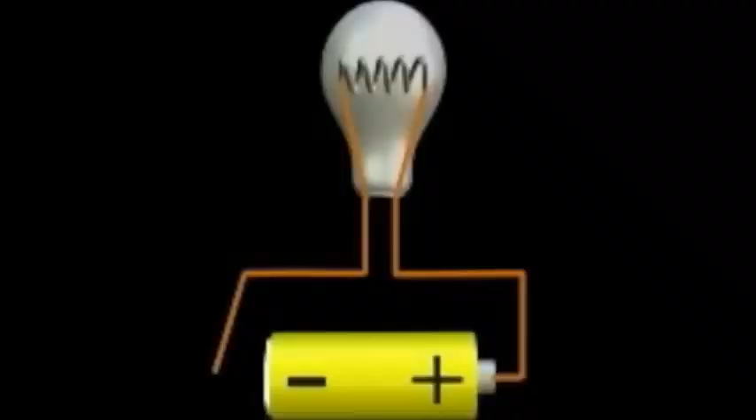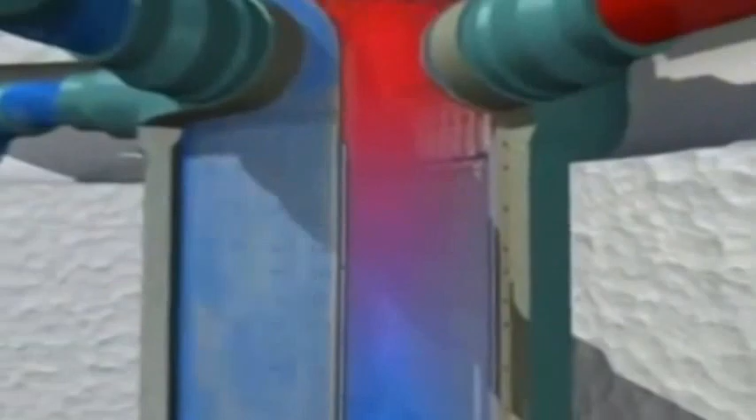My BTech as a mechanical engineer at SCTM Technical Campus. Friends, in this technological world, everything is going too fast. It is a collaboration of all fields like computer science, electrical, electronic and mechanical things.

When we took a glance at this field one by one, what we get is too much amazing. In case of computer and information technology, what we see is incredible. Everything is done by computer. We are totally connected with computers. When we buy anything, sell anything, everything is now happening on computers.

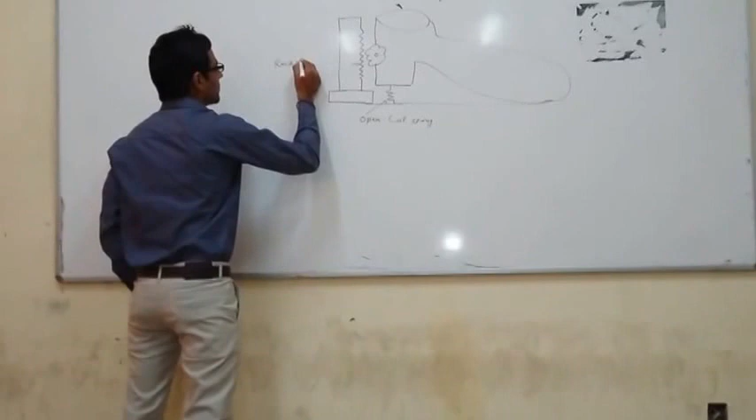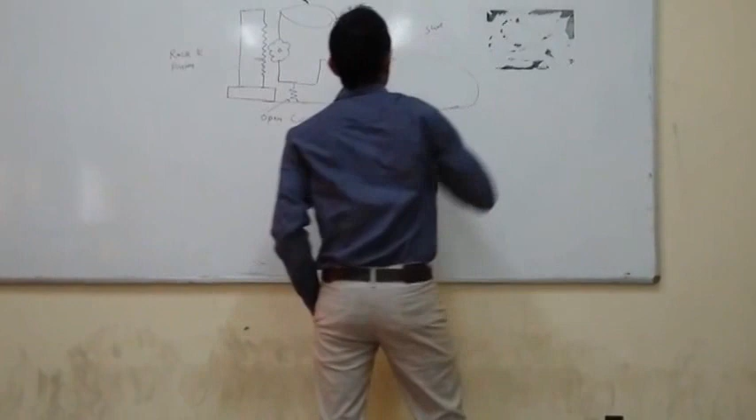When we come to the electronic part, it is an early technology which made everything at micro level. Everyone is addicted to these devices. The best invention of this field is our mobile phone. Everything is just in one touch. We have to view our temperature, news, everything.

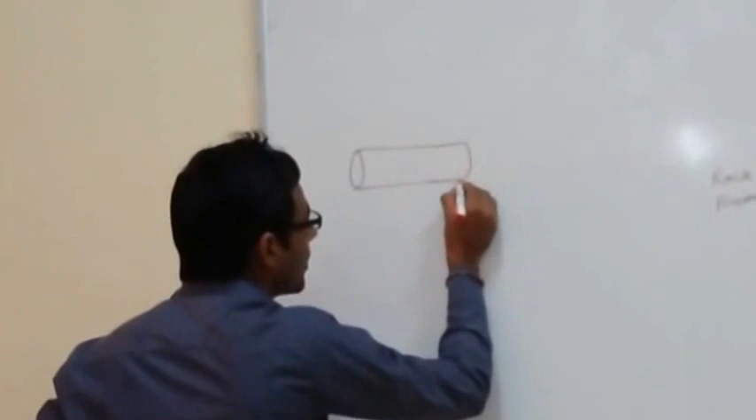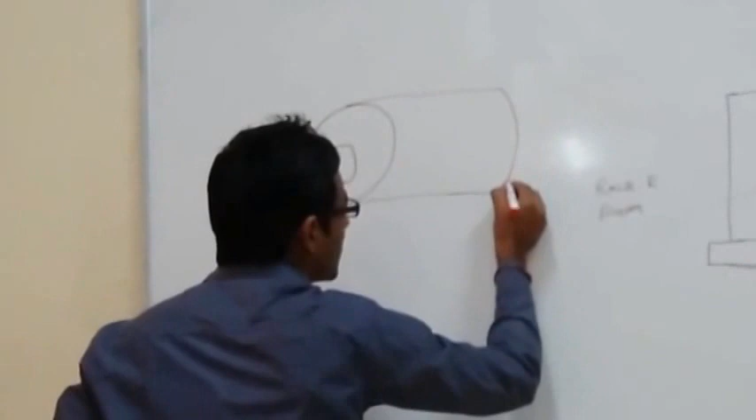Just amazing. If we take the electrical part, then it is the heart of all the above technology, which is electricity. Everything made by us works if we have electricity. Production of electricity is also an attractive method. It can be done by sun, water, nuclear power plants.

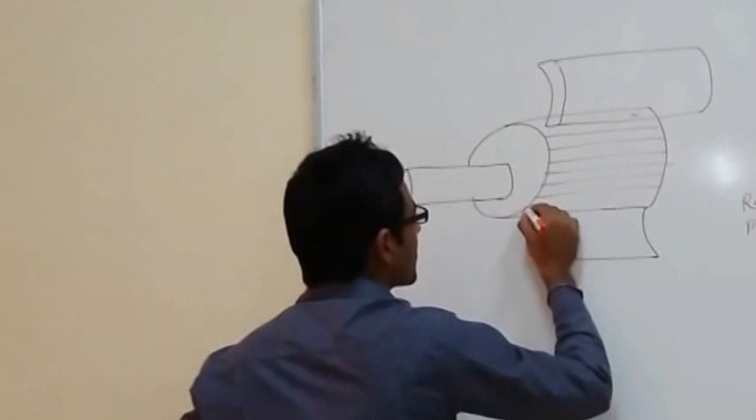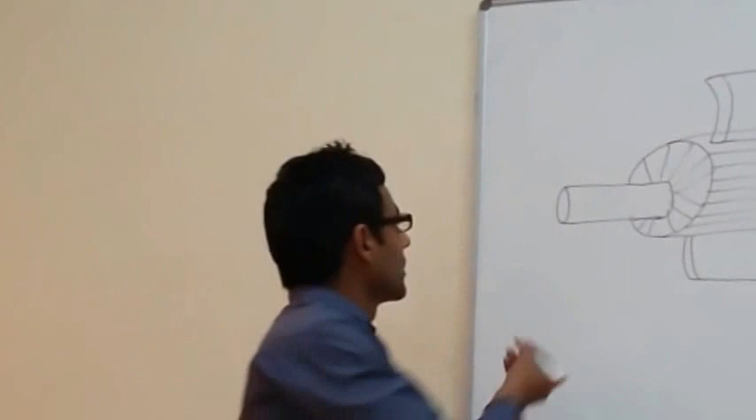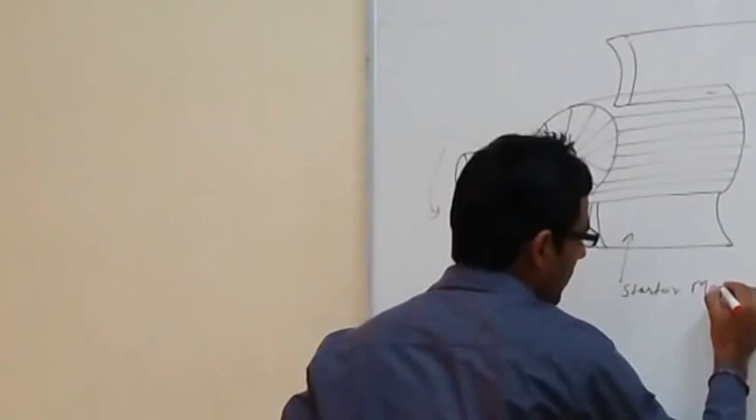In this world, every country produces million or billion watts of electricity per day. Even then, there are lots of places in this world where electricity is a big problem.

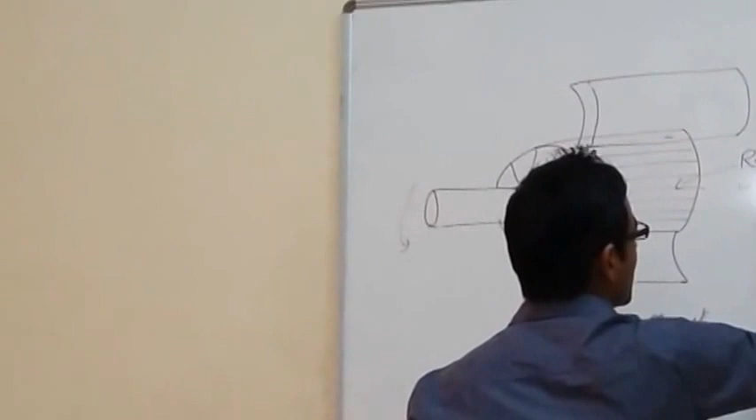Anyway, come to the point. In this busy life, no one has time. Everyone is running behind his work. People don't even have time to charge their phone.

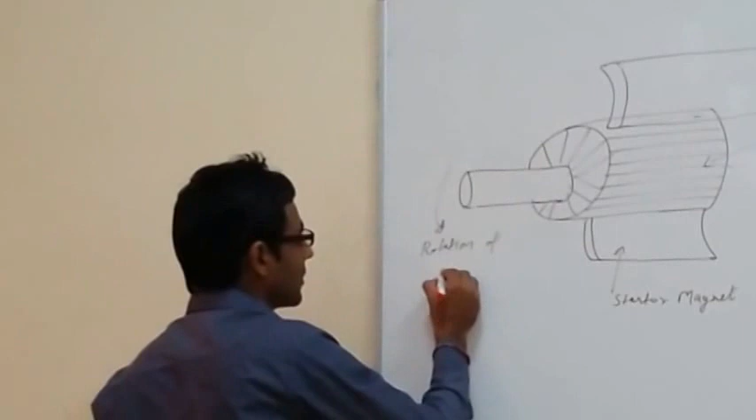To overcome this problem, my friends Sanjeet, Mr. Anil and my friend Shiv made a design to solve this problem. They made a shoe mobile charger so that when we walk, we can charge our phone. Now Mr. Sanjeet will show you the design of that project.

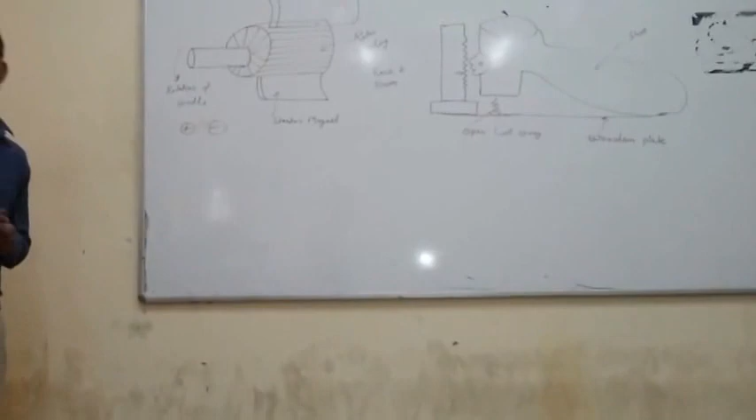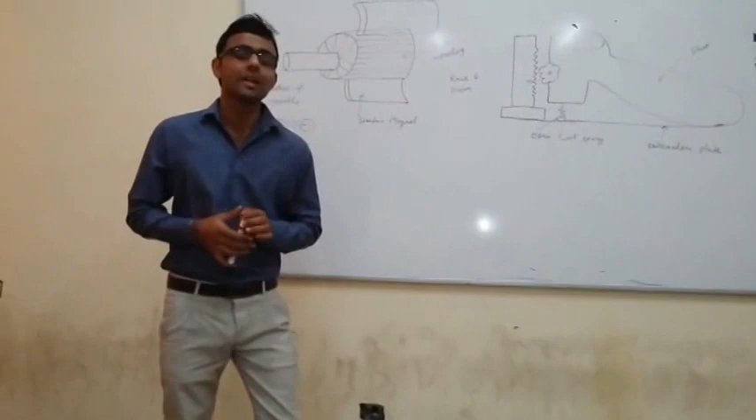Now I will draw our project design. This is the rack and pinion mechanism which is used for the rotation of the device fitted in the shoe. And this is the open coil spring.

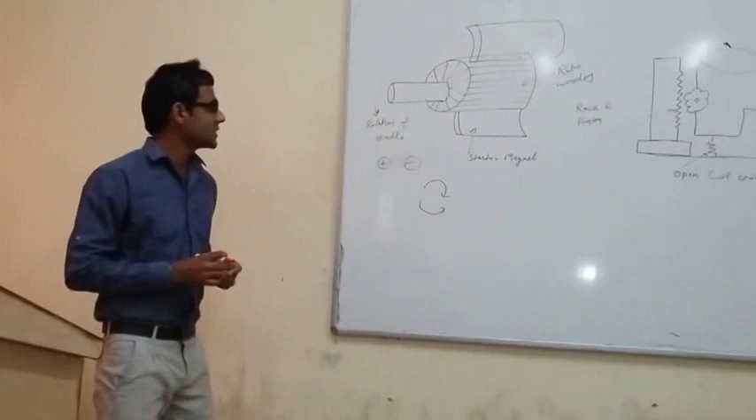This is the rack and pinion mechanism. This is your shoe. This is the whole diagram of our project, which is used for electronic devices.

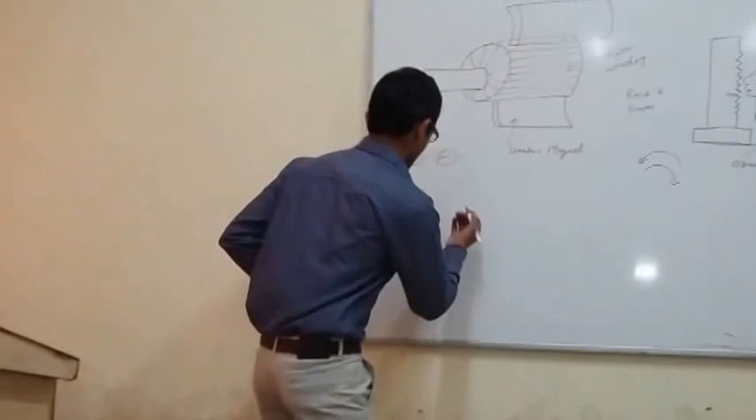Come to the point of how we produce electricity. In our daily life, a dynamo is a device which produces electricity. Now I want to show you the diagram of the dynamo, how it works.

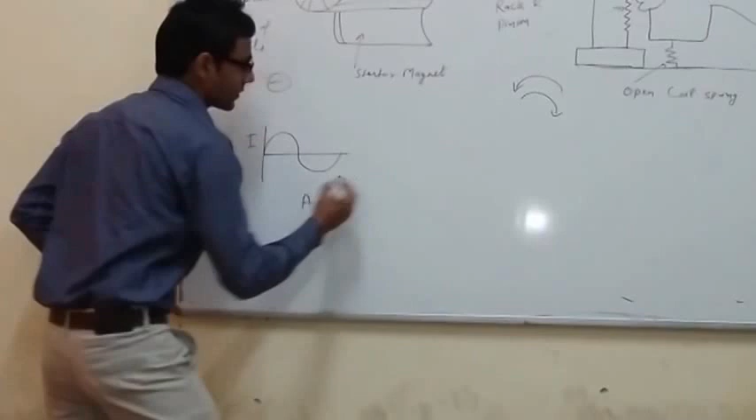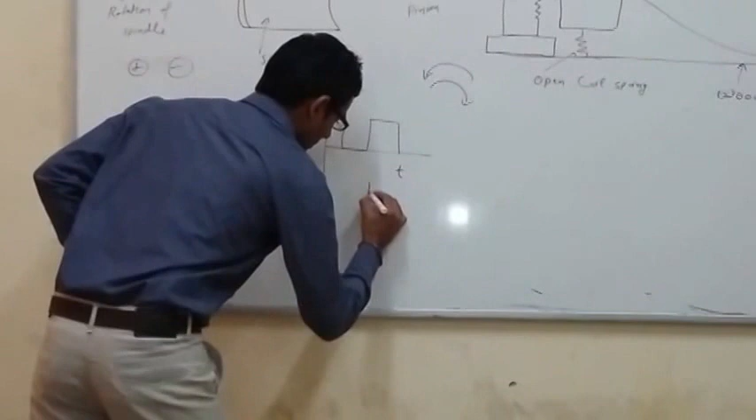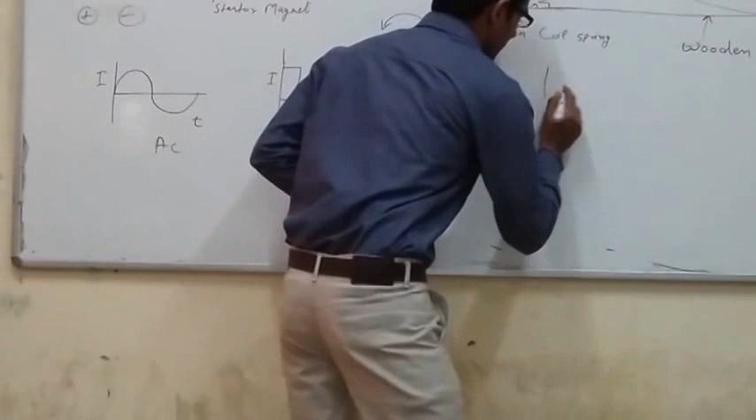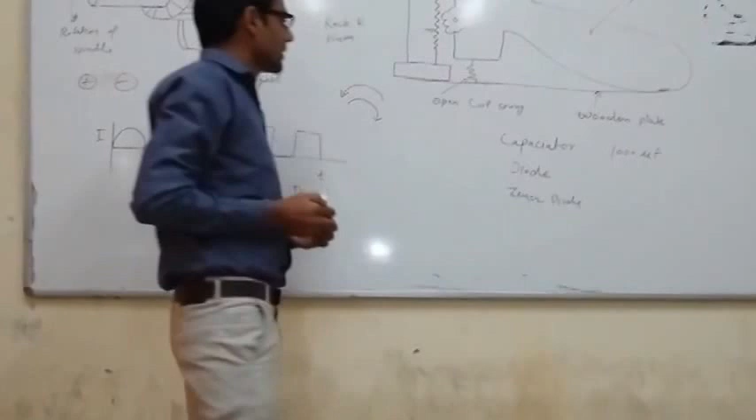This is your spindle. This is a stator winding. These are the magnets. This is the whole diagram of the dynamo.

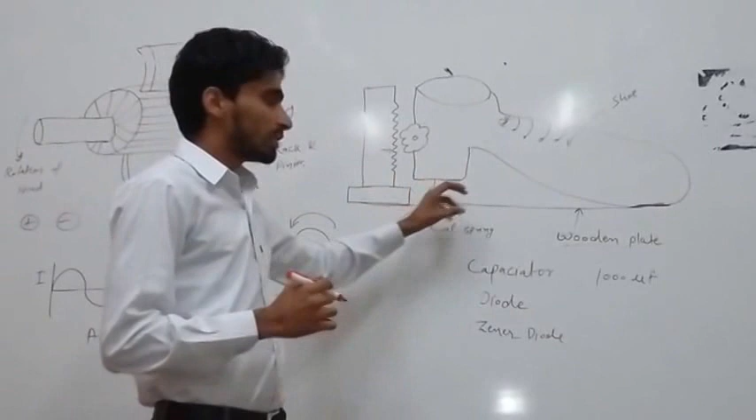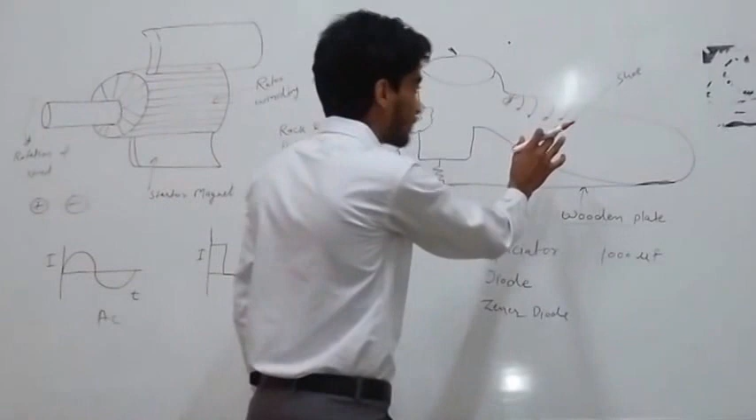This is the rotor winding, and this is the rotation of this spindle. Now, it is a device which produces electricity as direct current, and it is best for your electronic devices. This is the whole diagram of the dynamo, but the limitation of the dynamo is that it requires more rotation for generating the electricity.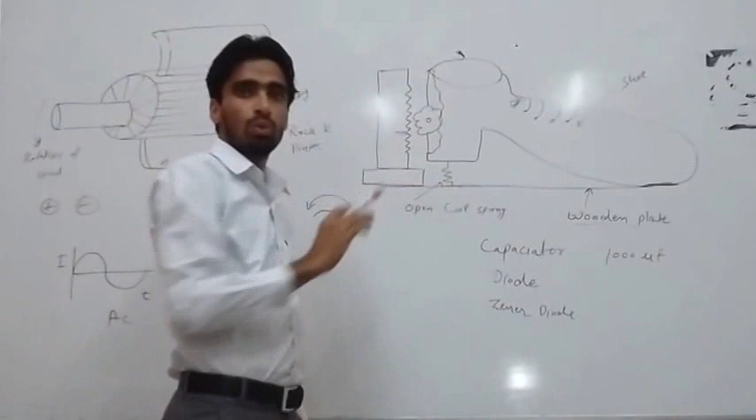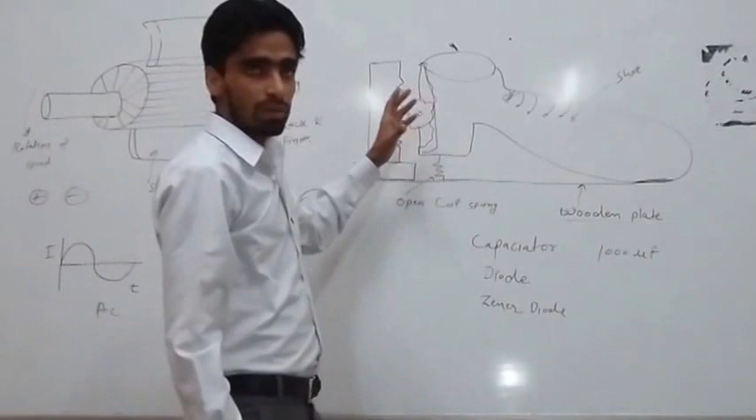Second, the dynamo rotates in only one direction, either anti-clockwise or clockwise, depending on our circuit. So this is not suitable for our design, and we don't use the dynamo in this product. To remove the limitation of the dynamo, we need a device which produces electricity in both directions, anti-clockwise as well as clockwise, at the same time.

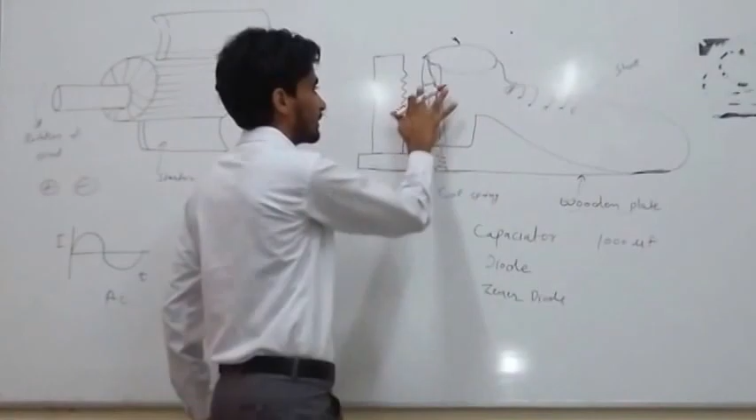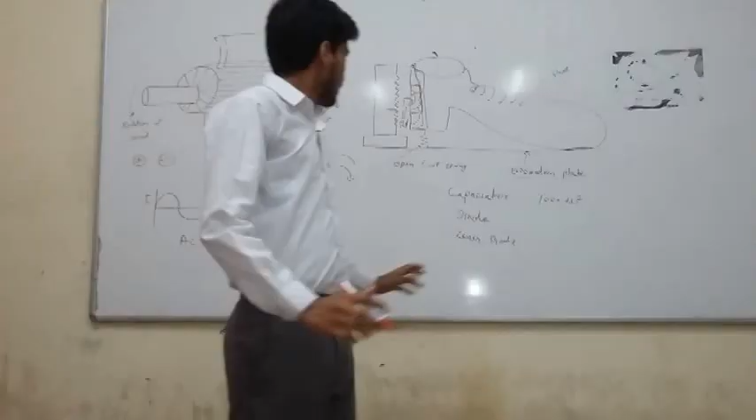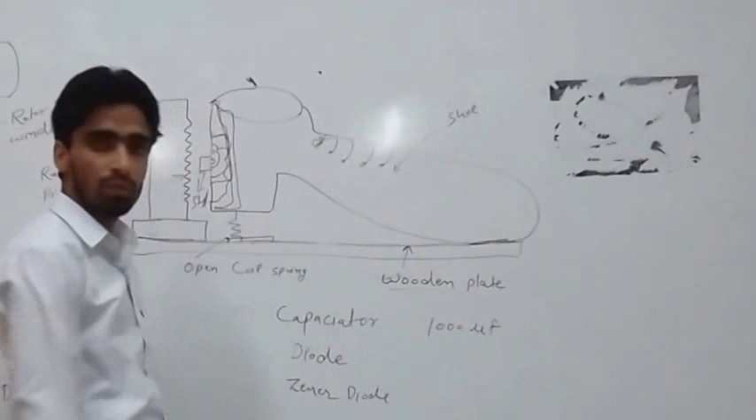That device is the alternator, and the alternator produces electricity in both directions, clockwise and anti-clockwise, at the same time. But our dynamo produces electricity in only one direction, depending on our circuit. The alternator produces electricity in both directions at the same time, like this. This type of rotation suits our project, so we can replace the dynamo with the alternator.

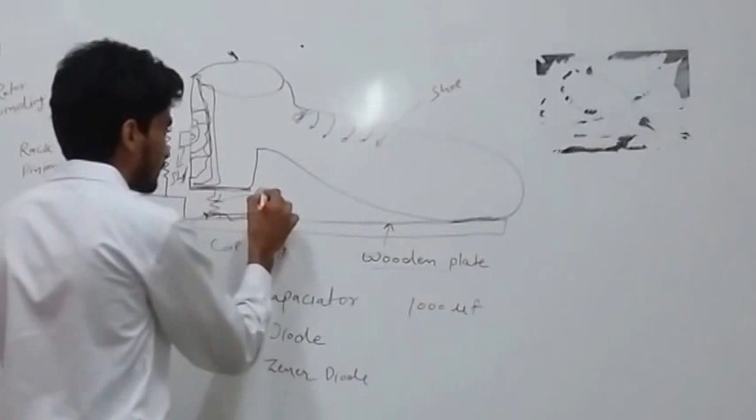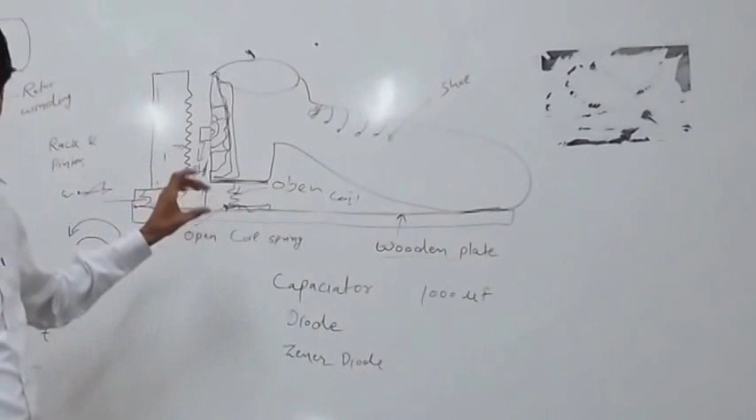Now I want to show the figure of alternating current and direct current. This is AC. This is DC. But the alternator produces only AC current, so we require some other instrument which converts the alternating current to DC current.

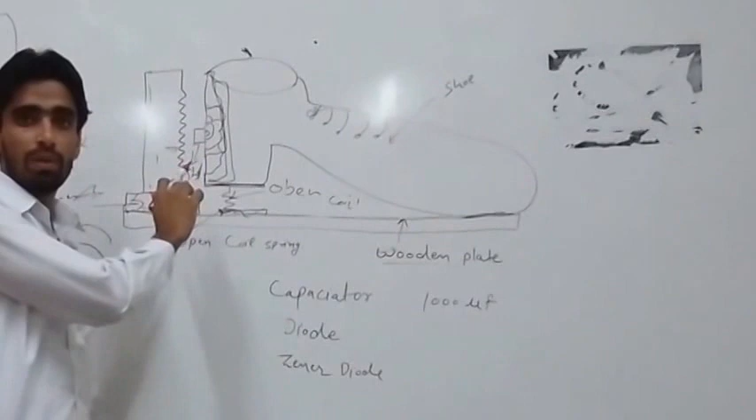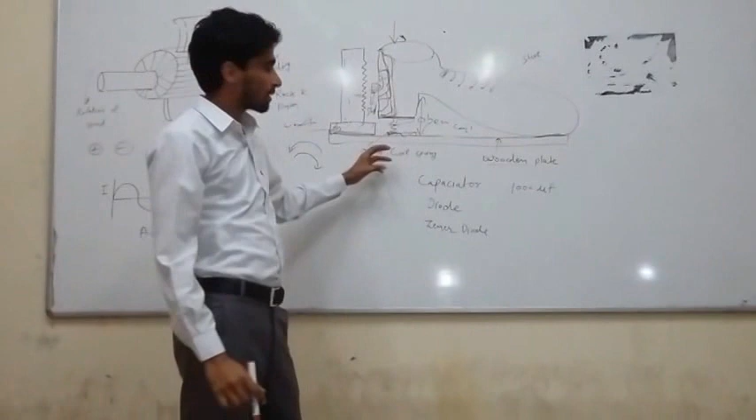We need a capacitor, a diode, and a Zener diode. So now we can easily convert the AC current into direct current, and it's also used in our project. So this is the whole process.

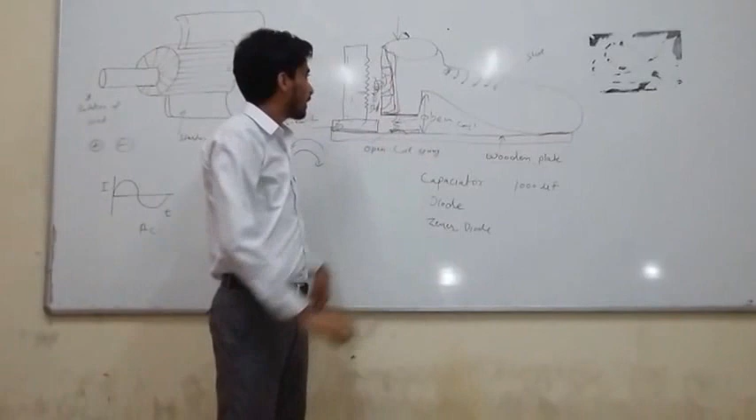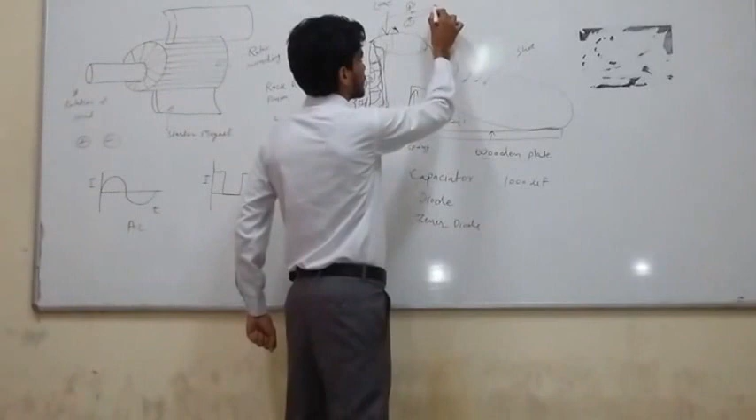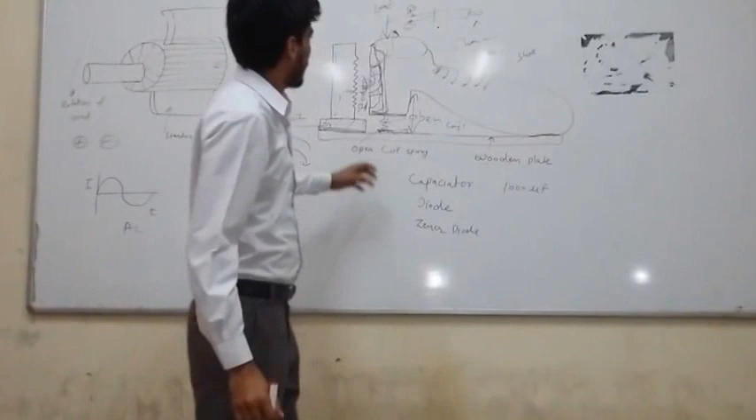First of all, we will collect all the equipment necessary for our project work, like a shoe, an alternator, a rack and pinion mechanism, a rack gear, a spring, a wooden plate, and some other accessories like a glue stick and other things needed to bind everything together. I will show all the things in a moment.

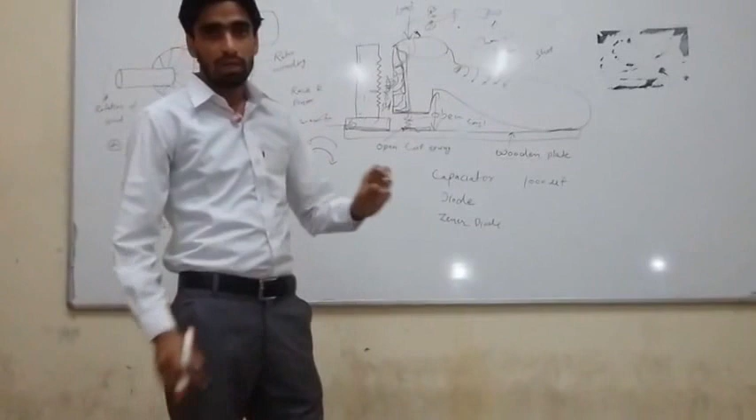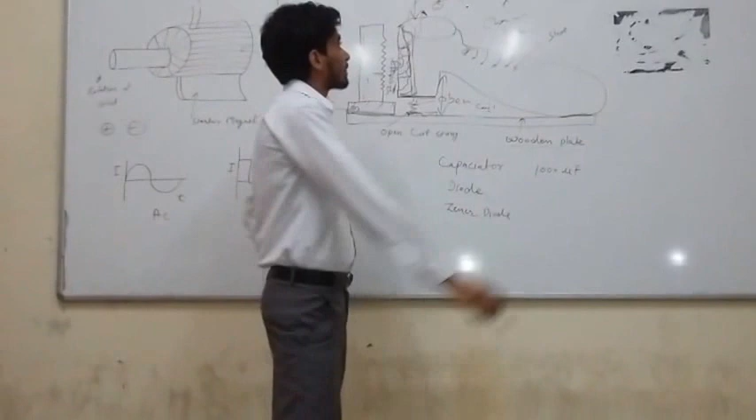So, this is our shoe. Consider this our shoe, and then we will cut it from behind. All this area will be cut with a cutter, and then we will grind it so it can mesh with our metal sheet. The metal sheet is the equipment that will take the place of the shoe's rear end.

Here we attach the metal piece with a hole in the center, and then we will take our alternator and place it inside the shoe. This is our alternator, and it will look like this.

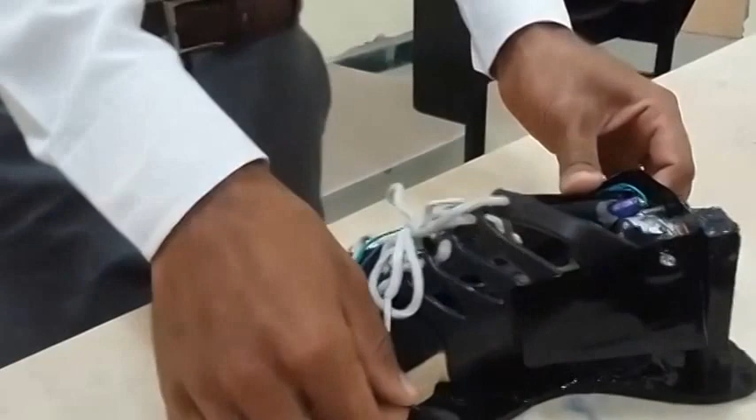This is the shaft of the alternator. When the shaft rotates in a clockwise or anti-clockwise direction, it doesn't matter, it will produce electricity.

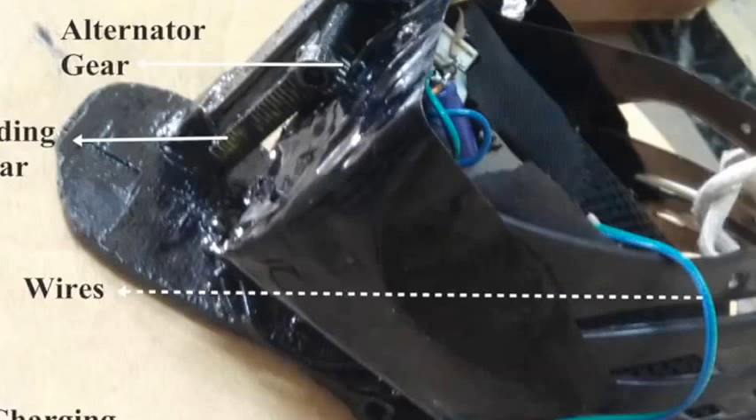Now we will take our wooden plate. This is our wooden plate. Then take the spring and fix it to the wooden plate. Here we can use a glue stick, which is very easy to use, and attach the spring at the bottom of the shoe. This is an open-close spring.

Then take the rack. This rack can be attached to a wooden part. We can say it is a wooden part, and attach the rack on it. Then this wooden part can be attached to the wooden plate at an angle so that it can easily mesh with the shaft of the alternator and also not rub against the metal sheet. So the angle can be anything like 2-3 degrees or 10 degrees.

After attaching this, now our assembly is ready, our product is ready to use. Here is the up and down movement of the shoe. When any force or load is applied on this end, it will compress the spring, and the shaft will rotate according to the force applied on it.